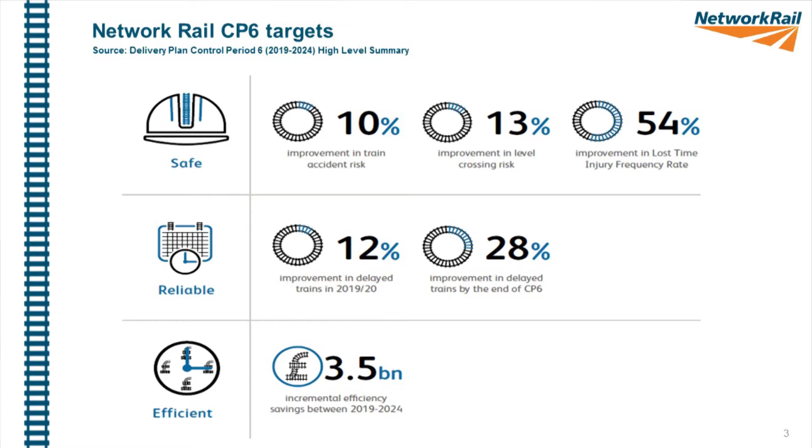And of course, across Network Rail, we're always looking for efficiency, and I see that as a major challenge. In CP5, our unit rates for track engineering and track renewals increased way beyond anyone's imagination, to be honest. We've got to try and reverse that trend. We've got to get better at managing the value in every renewal and maintenance intervention we make to the railway.

Then we've got our people. We've got a key role to play in making sure that within Network Rail we have as diverse a culture as possible, because that way we'll get creative thinking, new ideas, and really start to make the most of our opportunity for innovation across the business. And then we've talked about environmental impacts, so reducing carbon emissions, but also making sure that we meet the weather resilience and climate change challenge for our asset.

For every single bit of innovation and research development, we need a clear line of sight to our business risks. This chart shows that in Network Rail we have a series of bow ties which visualize our risks across our asset base. We also have an enterprise level risk which looks at the risks in our standards and competency framework.

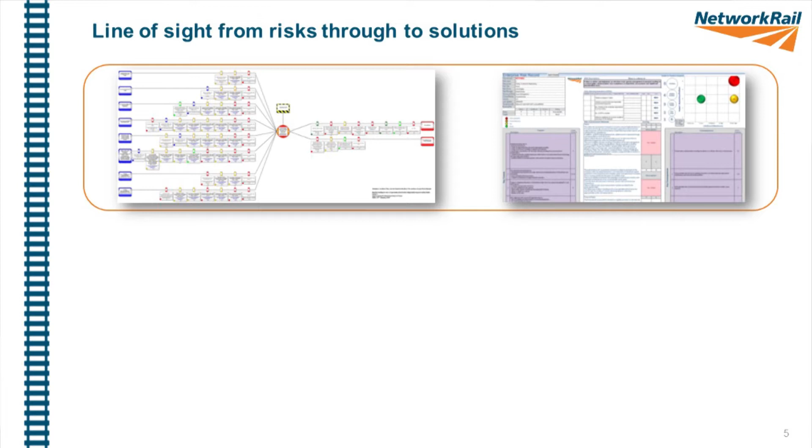To make sure we are improving those all the time, the output from that analysis feeds technology roadmaps, and this is where I think as a business we have more to do to provide you with the information you need to target your efforts on our bigger challenges. In my view, we should define the future requirements in terms of capability of the P-Way, or track and S&C, but we're not technology experts, so I need your help.

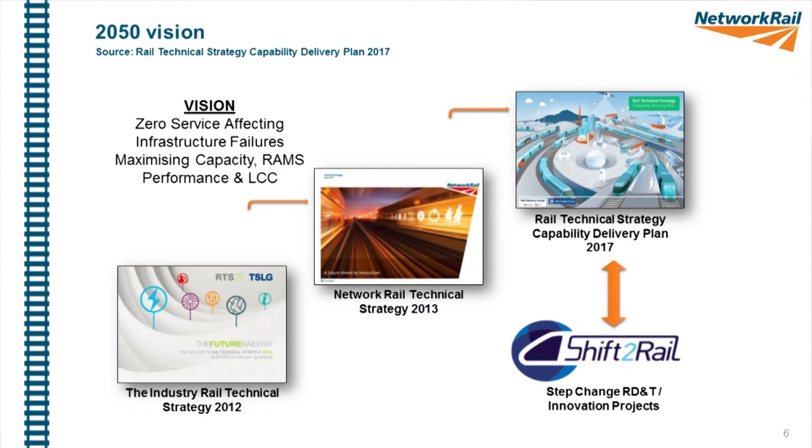To define the technology we need to develop to produce that additional capability over a long period of time. Ultimately that will inform our challenge statements which feed into the funding that we apply for, and that you will help us with in terms of the supply chain for delivering our technology roadmap requirements to improve the way we manage risk in future.

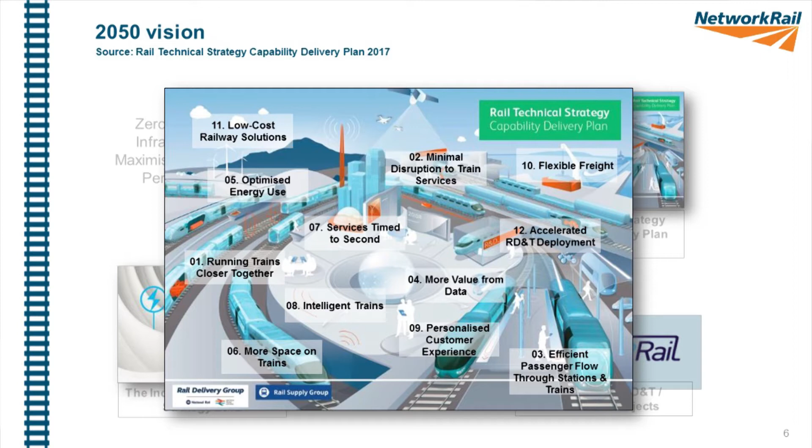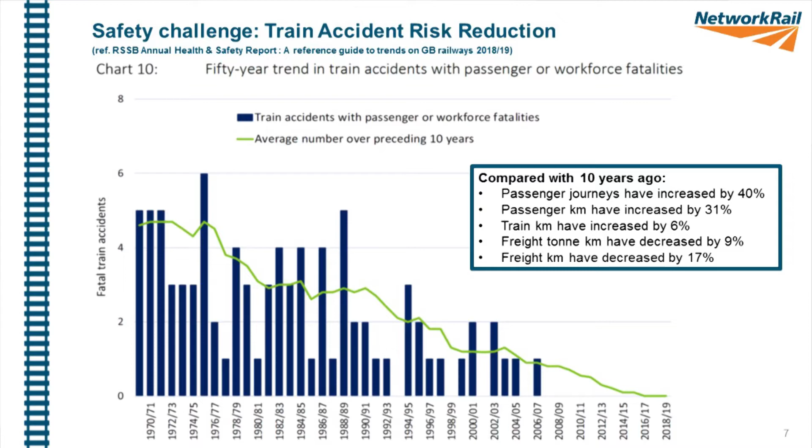And a bit more context. As a UK railway system, our safety record is unparalleled. Looking at our history of accidents with passenger fatalities, you're all well aware that the last incident was 2007. So we've sustained this impressive performance, and this is what the travelling public now expect. So one of our challenges is to maintain this level of railway safety at the same time as meeting this performance challenge.

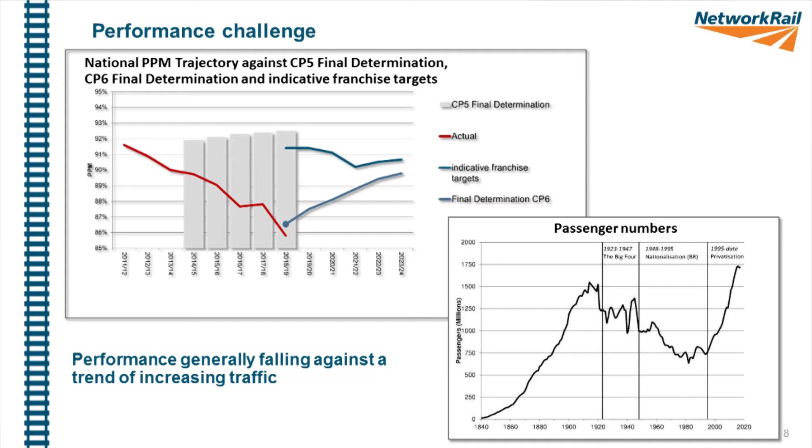The top left graph shows our performance in CP5, the red line shows our PPM performance. On the right of that chart shows the franchise targets for CP6, the top blue line, and there's our recovery trajectory. As Network Rail, that is what we need to try and deliver. But that's a big gap to close.

One of the ways I'd like to make sure we do that is for every R&D project that my team runs and supports, there's a clear route or regional sponsor for that development. We've started it with intelligent infrastructure and with our CP6 R&D programs, but we can definitely get better at it.

There are good examples of how that gap has been closed, and you'll hear about those later today.

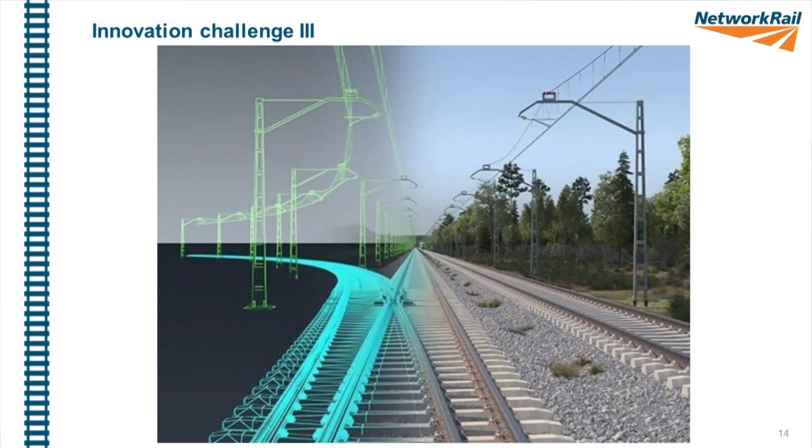Challenge 3 for me is turning data into information, then knowledge, then wisdom. We're swamped with data. In fact, that's what I've been working on in the world of track and S&C as their initial focus, is making sure we can align that data. Because without the ability to overlay our track geometry with our rail ultrasonics, with our GPR, with our hot weather stressing records, for example, how do we build that intelligence into where to focus our resources, where the risks are starting to emerge, and start to apply a more rapier-like targeting of our efforts and our resources at risk, rather than having to apply a more blanket approach to the way we manage the asset.

We definitely need more automation and more train-borne inspection. If we're going to move people away from the hazards of working on the live railway, then what sensor technology do we need to be able to monitor our asset so that we are understanding the level of risk and able to prioritise our response to that risk?

It's part of our European research. Talking to Phil Winship last night, we're starting to specify what we need for S&C in terms of monitoring stress, deflection, voiding, impact loading. Why don't we get to a position where for every S&C we install, it's plug-and-play instrumentation, so we can start to monitor crossing performance or switchblade wear?

You'll hear later about BIM. Brilliant presentation from Tom on BIM. As Network Rail, we're in the early stages of understanding what this means for us.

I'd like one version of the truth of our entire asset register and one single map of our asset. We're working hard on this, but we're transitioning from GEOGIS to a system called INM, which has highlighted where we've still got a lot of work to do to align all of our assets onto the same map. But we'll get there.

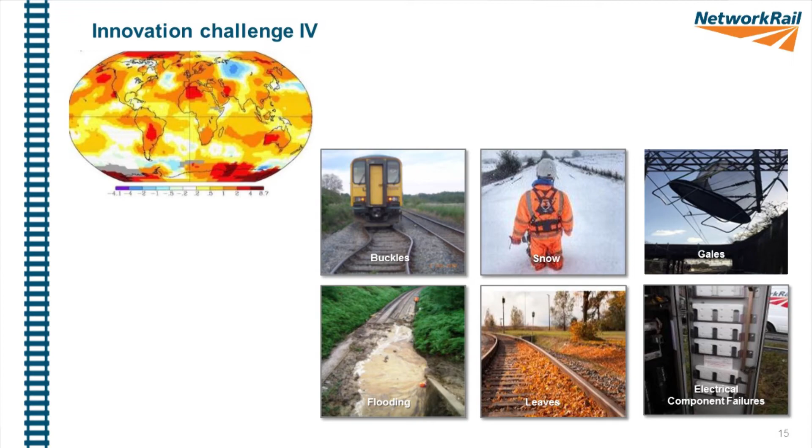More OLE, does that mean we have to be concerned about more storms, more disruption because we've built OLE? Discuss, really. But definitely something that is on my radar, making sure that as part of Network Rail, I align my thinking with our overall policy on climate change, and we work together inside Network Rail to understand how we're going to respond in a coordinated way.

We'll have 5 regions, each with a new team of permanent way engineers. For me, that's a great opportunity to make sure that as what will become the technical authority in Network Rail, we align our strategic thinking with their route strategic requirements. So what does each section of route need to deliver for the UK PLC in future?

In terms of economic growth, support for local infrastructure. But also, those teams will have a lot of expertise, and I'd expect them to support all of us in this room in driving forward some of the innovation, to get us over that valley of death by testing, by trialling, and by developing the solutions to the point where we can then share the best practice nationally.

So I've come on to a few ideas now that I think are brilliant ideas for the way people are tackling our current challenges and innovating.

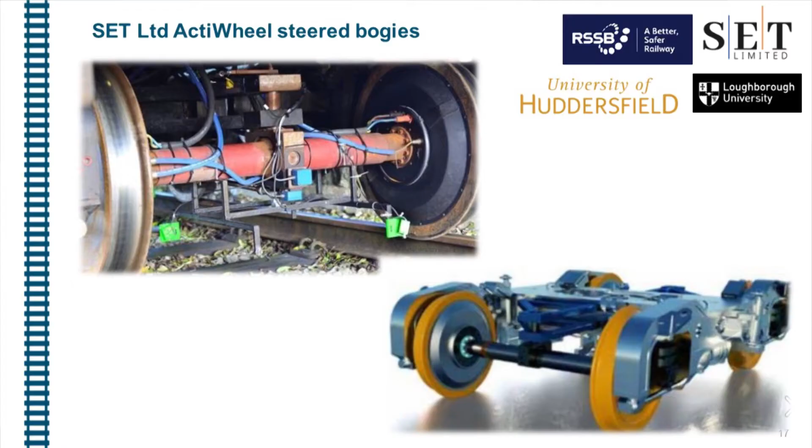First one, a vehicle-related challenge, and you'll hear a fantastic presentation from Giles later about the future of rolling stock. A lot of you will have heard of the ActiWheel steering bogie, a brilliant innovation that will reduce track damage, but also opens up lots of other avenues for the way we design the infrastructure and rolling stock.

These independently powered and steered wheel sets reduce the weight of the bogie by around 2 tonnes, and offer the future option of more space in the rolling stock above the bogie, so potentially double-decker trains. They also offer the ability to look at S&C design again. If you can steer a train to change direction, then we could rip up the rulebook on S&C and look at our P-way design from a whole new light.

Obviously very cutting edge, a long way to go, but a really exciting idea. In terms of weather resilience...

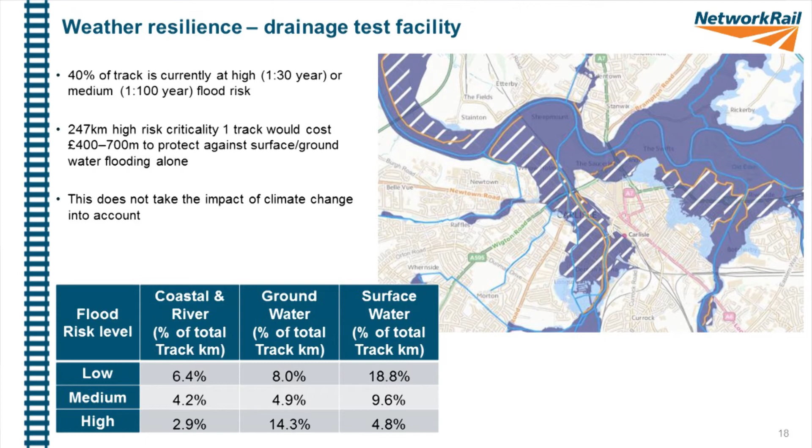Network Rail is building a drainage test facility, and the reason I include this is I'm really encouraged that we're starting to put some serious horsepower behind drainage. We're building this at one of our test tracks, and it'll give us a facility to train our teams on drainage inspection, maintenance, and renewal in real scenarios. The test track itself has got some drainage issues, so this is helping solve some of those challenges, or we can test new products and new technology in light of them. It'll give us a better understanding of how we develop and manage our drainage systems.

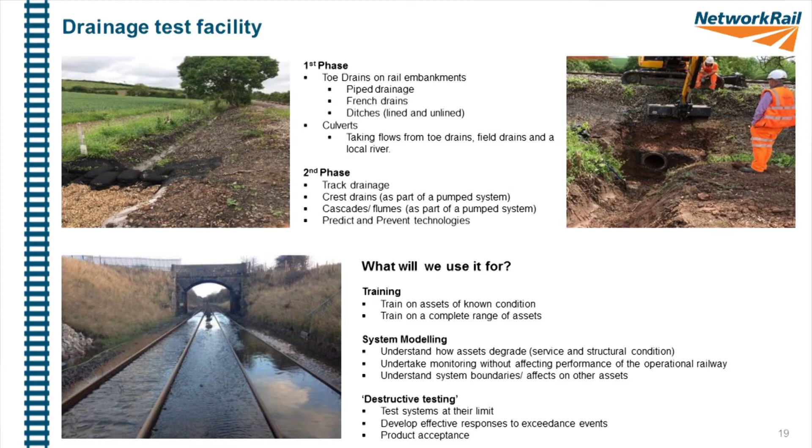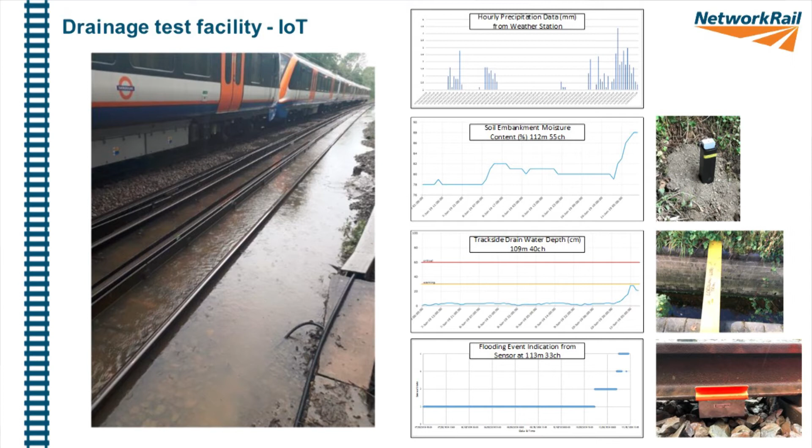We're also using it to build in, if you like, the Internet of Things version of drainage sensing technology. So we've got level sensors, soil moisture content sensors, and sensors on the rail itself to highlight when there's a flooding risk emerging. The graphs show the 3 different types of sensor and an example of the data from them. These are now providing real-time alerts to the engineers on our IDC about flooding at certain points on the test track. I'm just really encouraged that we're starting to put more and more emphasis on drainage.

Another aspect I'm really encouraged by is the work continuing in the world of embankment monitoring and earthworks management, clearly in the headlines again over recent months because of all the rainfall and the various land slips.

We're using track quality data, and we've developed some new metrics to take existing track quality data from our measurement trains and understand the degree of vertical and lateral movement every 10 yards on our embankments. We've tested this over 1,700 embankments up to now, and we're rolling it out on LTN1 at Liverpool Street to do more validation and assess the numbers of false positives, false negatives, and useful data generated by this approach. Certainly encouraging signs so far.

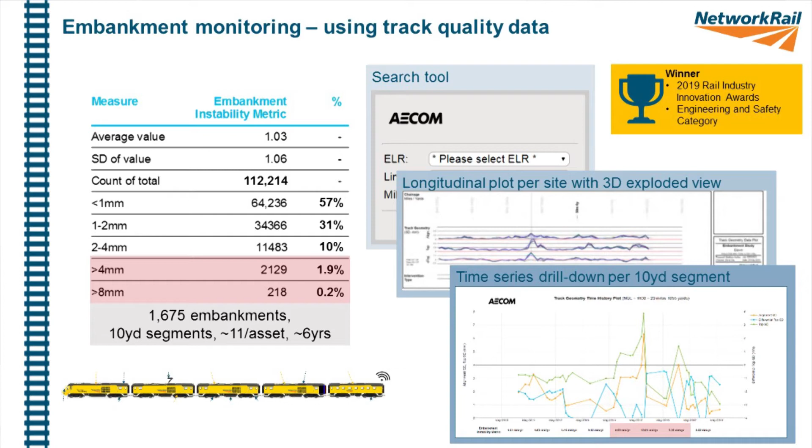We're also testing a system that is already well developed in other earthworks engineering projects, such as dams, where we're installing sensors that measure the resistivity of our embankments. We put a network of sensors in, and it gives us, in effect, a three-dimensional plot of moisture content, but also embankment movement.

We're testing this at 2 high-risk sites in Wessex, the idea being that we get an early warning of any problems in the embankment. By monitoring the moisture content, we can look for longer-term signs of problems, allowing us to target our precious CapEx at the right locations.

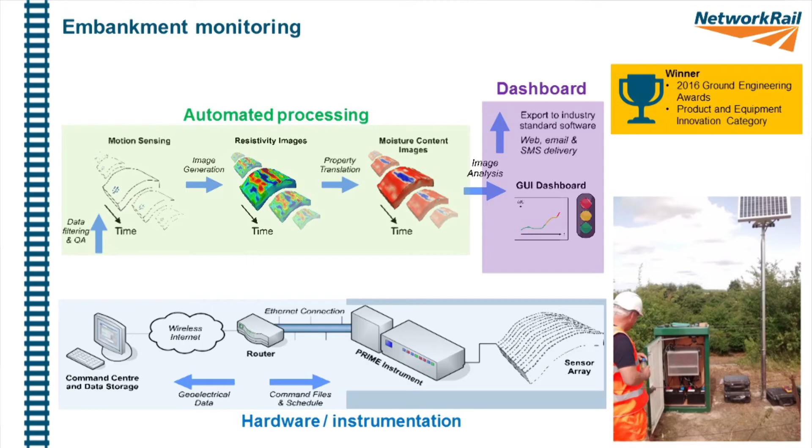You'll have already heard of something called the decision support tool Network Rail is building. This, in essence, is an example of where I think we're targeting our efforts at those people who are making the safety-critical decisions day in, day out, and intervening on the railway to carry out safety-critical work every day.

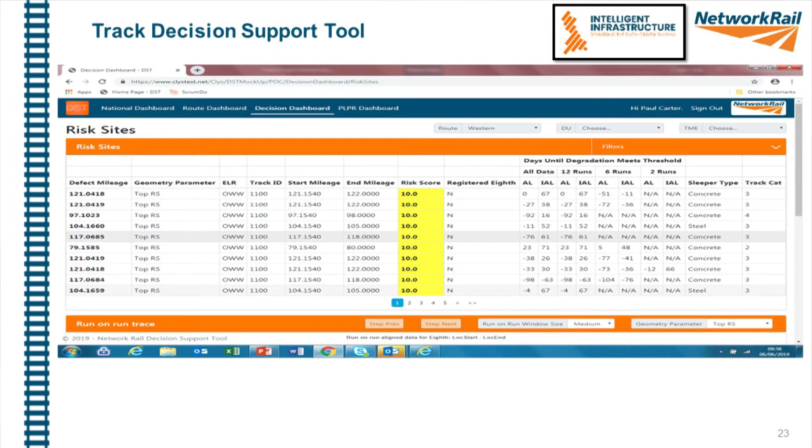So we're collecting our data together. We're starting to build a kind of holistic picture of the asset condition and the rates of change, and that's key for me. I want us to move to a position where we can monitor rates of change to allow us to know when we need to intervene.

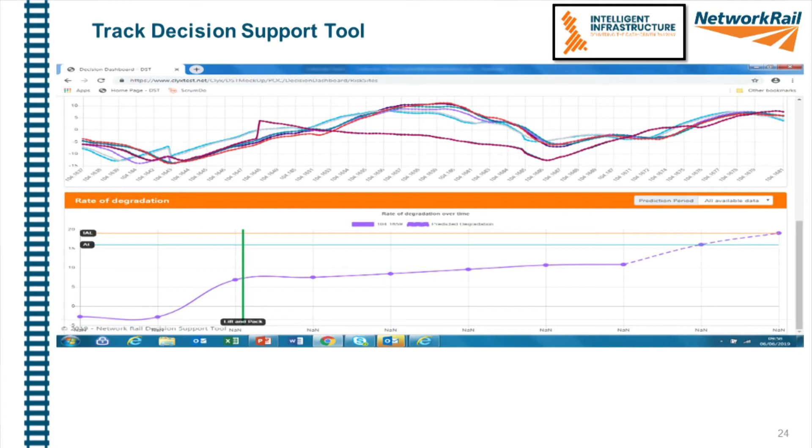An example here, this is a track geometry plot. The team have worked very hard to develop some clever mathematics to allow us to overlay and align every single trace from our track recording vehicles so that we can get more confidence in those rates of change. The work continues to refine and improve that degree of overlay. But we've got initial versions of this rolled out to our delivery units, and track maintenance engineers are starting to use this technology in anger to help them with their maintenance planning.

And the algorithms will improve to automate the analysis and processing so our engineers get the information they need to make a decision quickly rather than having to plough through gigabytes of data. But it's really an example of just the direction we're taking with our existing asset data and improving its applicability to maintenance inspection.

Another fantastic example, I think, of some innovation that is targeted at the teams that really need it, and they are helping scope the requirements for this tool, is a visualisation tool that allows us to design our ESR and TSRs safely and effectively.

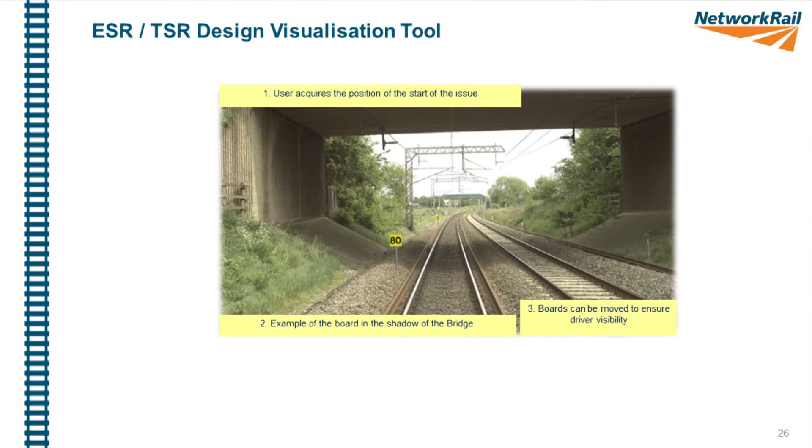So this is the Omnicom Balfour Beatty video imaging from front of vehicle. And the software tool allows you to place within the software all your boards according to the requirements of your ESR and TSR design. It will highlight conflicts.

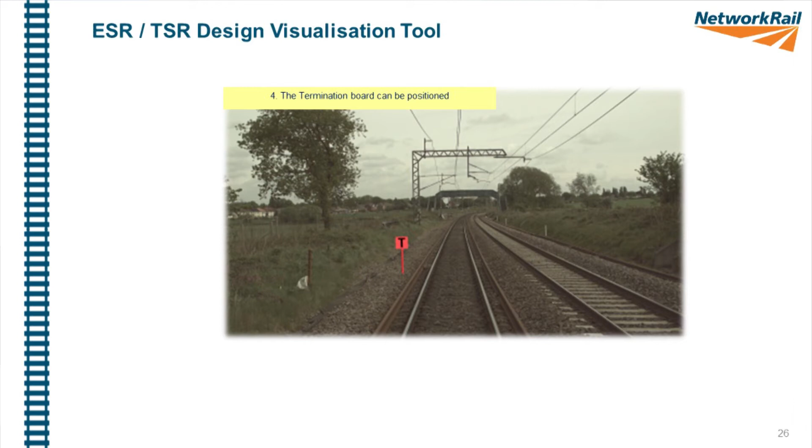So if the warning marker is being placed too close to the start of the speed restriction, it flags up these conflicts and suggests to the user how to rectify them. So before we've got anywhere near the track.

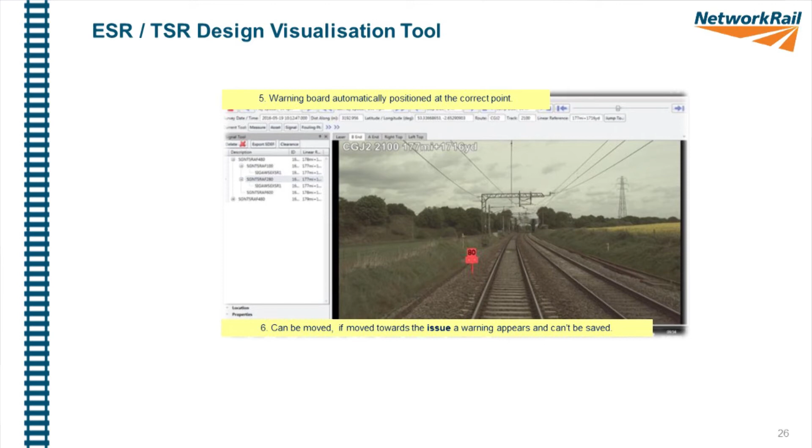But the really important bit, I think, is once all this work has been done inside the tool, then the software will generate a plan for the ESR, TSR, including images of the sites where each of these marker boards and equipment needs to be placed.

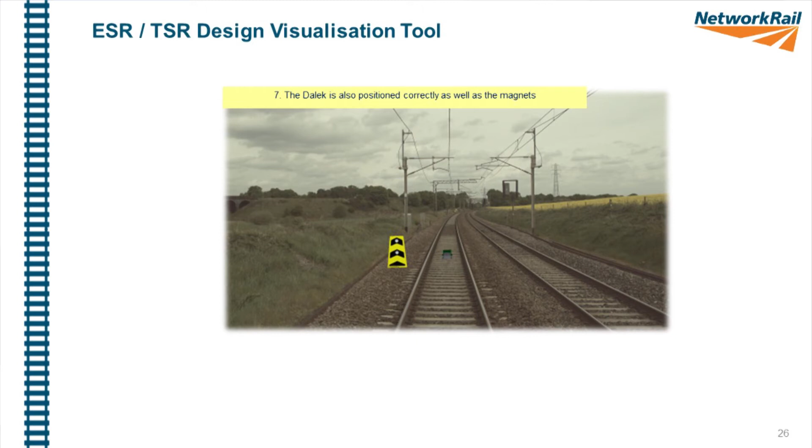So it reduces the scope for error once the teams go out on site to place the equipment. So it's right first time application of the speed restriction equipment. It's got huge interest across Network Rail.

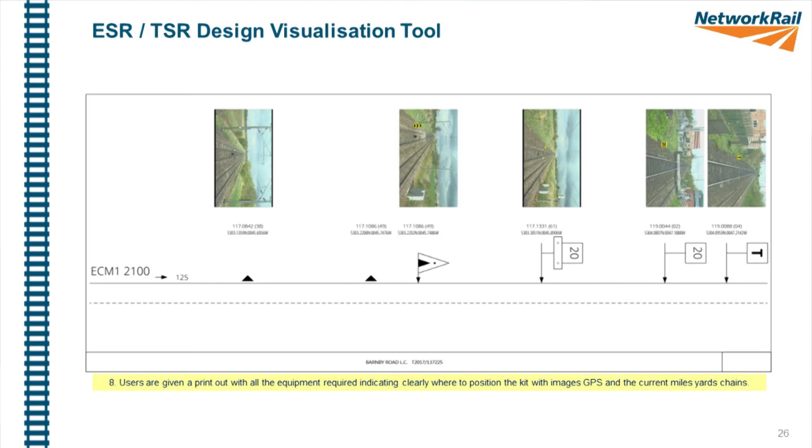That's another great example of where the collaboration between our supply chain and our maintenance colleagues is going to deliver something that will revolutionise the way we look at our switch derailment hazard risk.

I think we're going to learn an awful lot from the new data we collect, moving away from that manual inspection where we rely on a very thin feeler gauge to work out whether the wheel-rail contact is safe or unsafe at every high-risk switch, to something that is a lot more objective and also allows us to generate those rates of change, degradation rate data as well.

I'll also mention induction welding as a project which is perhaps slightly more complicated in terms of getting it through that valley of death process. So we've got a lot of suppliers involved.

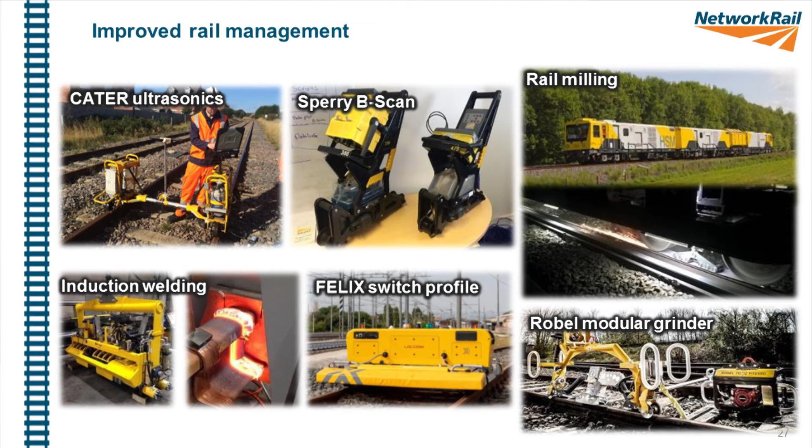And then just to wrap up, some more examples. I'm a bit of a materials geek, so I've got a couple of materials-based examples here.

I'm sure you've all heard about some of the composite materials we've applied in track to replace timber in our P-way. Newark Flat Crossing being the best example, which Phil Winship and others have presented on in the past, installed last year as a replacement for the timber lattice on the East Coast Main Line.

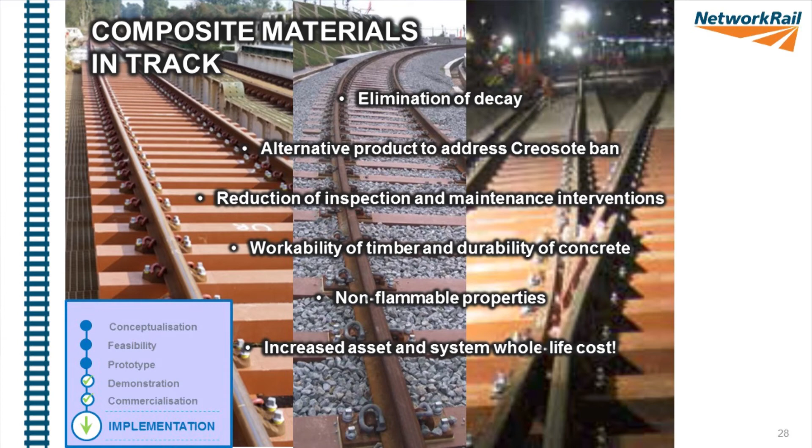But we're now at a stage where we have pretty much signed contracts for composite replacements for all of our long timber materials. So from this month, Routes and Regions will be able to purchase an extruded or pultruded fibre reinforced composite material that we can use to renew all of our long bridge beams.

This removes a lot of the failure modes based in timber degradation and rot, and will give us a more sustainable asset on some of our higher risk locations in the future.

We're also very close to closing the deal on plastic sleepers. In the next 2 months, we'll be in a position to start phasing out the use of creosote treated softwood timber sleepers. The driver there is legislative—we'll be banned from using creosote in our industry at some point, so we had to act sooner rather than later. It also benefits our workforce by removing a health and safety hazard during the handling of creosote-treated sleepers. And coming soon is a composite bearer for S&C with a modular option.

That's also in the pipeline for implementation later this year—another example of successful collaboration between our supply chain, our routes, and members of the engineering community to develop a solution for some long-term challenges.

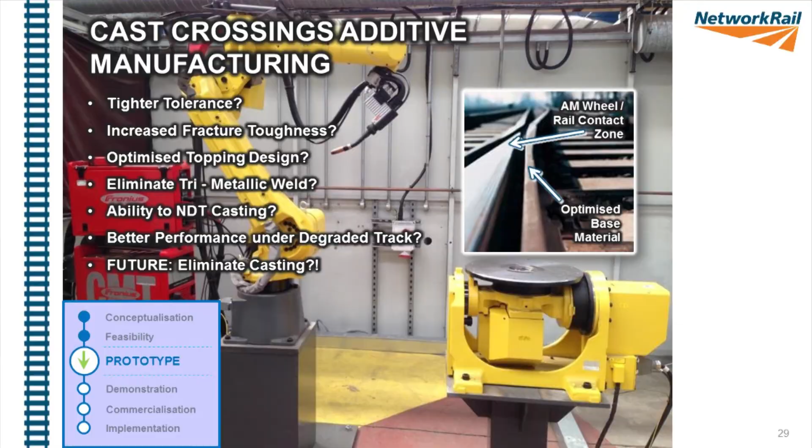But we're looking at some really good, exciting research into what other material options there are. We'd like to develop a composite crossing with different properties as you go from the running surface through to the foot, because they have different duty requirements and loading conditions.

Some of our European research is targeted at looking at, for example, 3D printing of crossings and other components. I think that would be amazing—if in future we need to replace a crossing, all we need to do is set off a bit of software to start manufacturing in a 3D printing environment, rather than having a 6 to 9 month lead time from our supply chain for a cast manganese version. It's a long way off, but really exciting stuff in my view.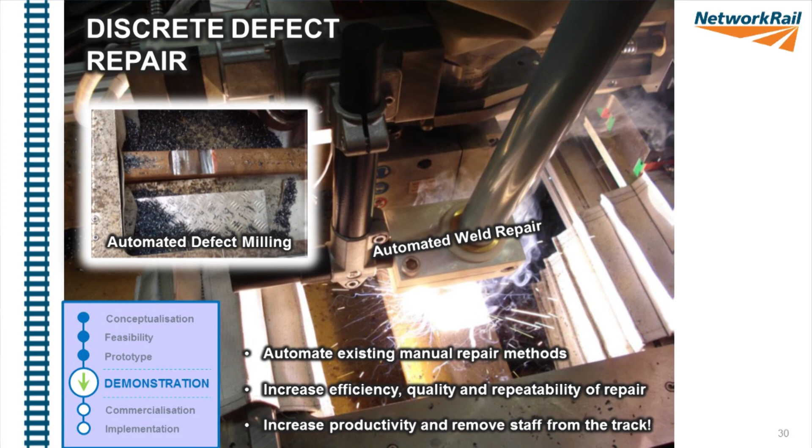This is something we're pursuing not only through our European R&D, but also Amey and Babcock have versions of this kind of technology which they're looking to target at S&C. We're starting to work with those two organisations to see how we can bring all this together so we have one strategy for automated weld repair of all rail faults.

So to finish, I've taken you through my views on some of our challenges in terms of business and economic drivers for innovation. I've taken you through some of the challenges in delivering that innovation, and given you a selection of ideas I think are starting to solve some of those issues. But we've got this massive opportunity, so let's make the most of it.

And I reiterate, please challenge my team, please challenge me. I don't want us to stand still. We need to target our efforts at the places where we need them most, but let's be really progressive about this, and I'm very much supportive of any challenge that we think will improve our future ability to manage our asset.